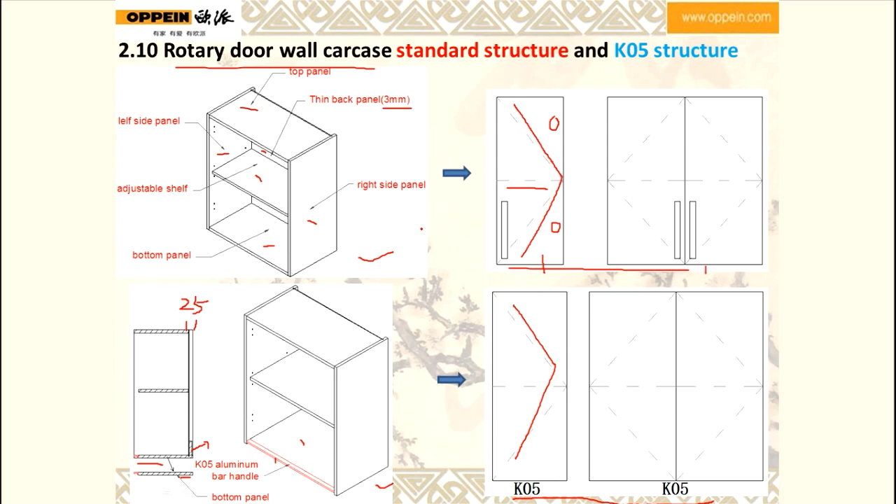For rotary door, the quantity of adjustable shelf depends on the height. When the height of the carcass is 500, it has no shelf. And when the height is 720 or 762, it has one shelf. And when the height is 914, it has 2 shelves.

And when the height is 1067, it is over 1000mm. Then the back panel is 16mm, and the carcass has 2 shelves.

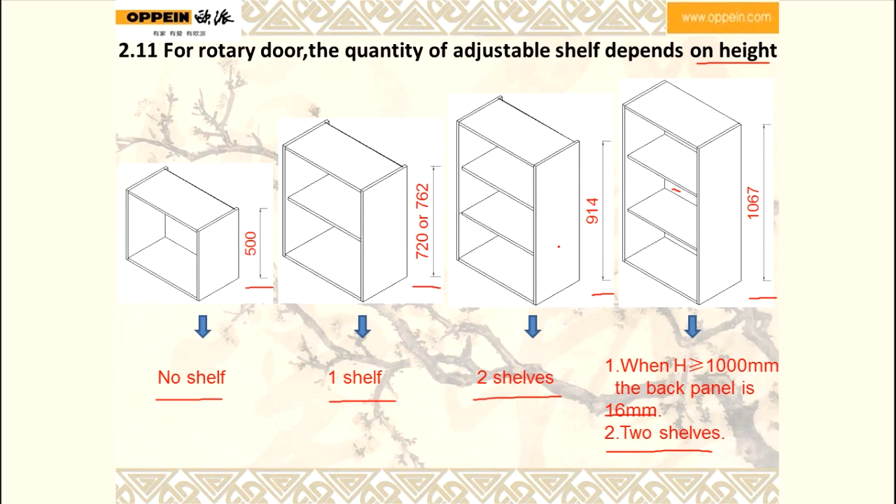Bifold lift-up door carcass. This is the standard structure, and this is the elevation of the standard structure. This is the fixable handle, and this is the bifold lift-up support code.

And this is the K05 structure. And this is the K05 elevation of the wall cabinet. And this is the code of the bifold lift-up support.

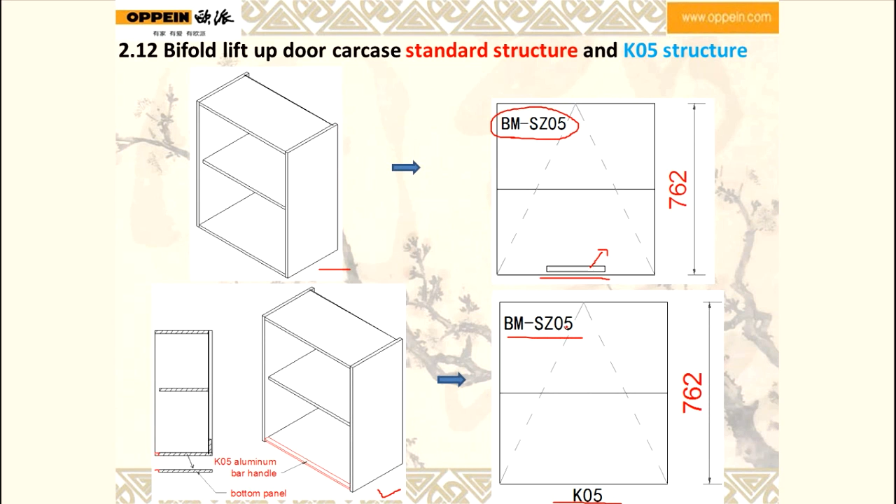Double lift-up doors wall carcass. This is the standard structure. This structure is different from the standard structure of rotary wall carcass.

The difference is here. The shelf is fixed, not adjustable, because it is for installing the hinge here.

And this one is the code of the lift-up gas support. And here H1 had better be more than 350 mil.

And this is the K05 structure of the double lift-up door wall carcass. Let's look at the elevation first. The bottom panel has K05 on it, and in the middle it is K04.

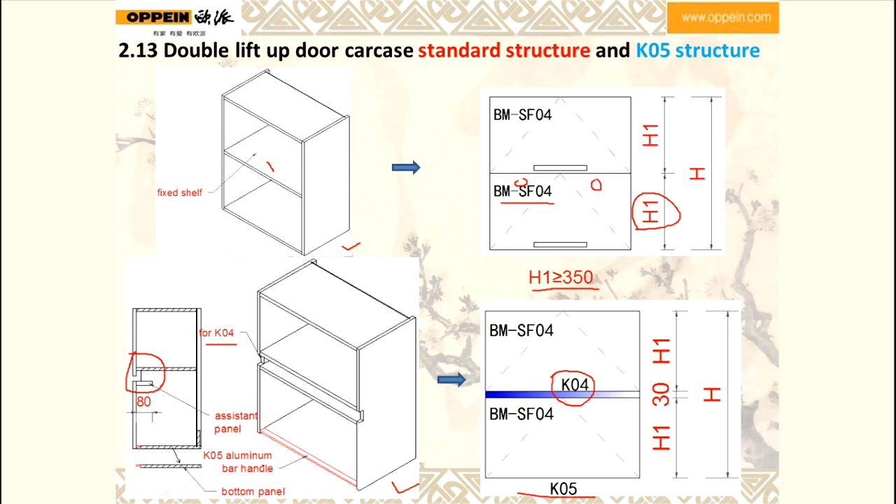This is a built-in microwave wall carcass. This is the structure. And this one is double doors on the top. This one is one lift-up door on the top. The notes of this carcass are as below.

1. For built-in microwave wall carcass, the standard depth is 330mm, and the standard width is 600mm. 2. In fact, the size of carcass depends on the size of microwave. 3. If the above door is lift-up door, then the height of the door had better be over 350mm.

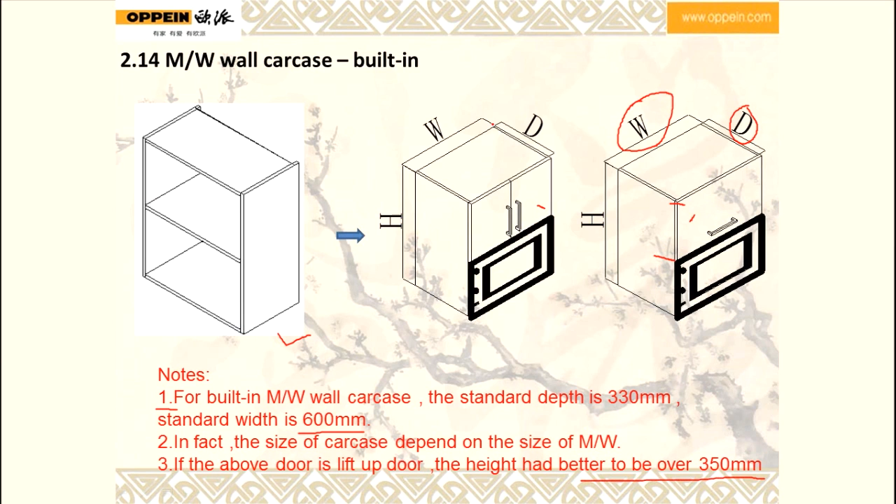This one is not built-in microwave wall carcass. The bottom panel is longer than the side panel. The microwave is not built in. It is put on the bottom panel.

And it has the arch corner on the bottom panel. It is for protecting the people from getting hurt.

The notes are as below. 1. For not built-in microwave wall carcass, the standard depth is 305. The bottom panel depth is 380mm, and the standard width is 600mm. 2. In fact, the size of carcass depends on the size of microwave.

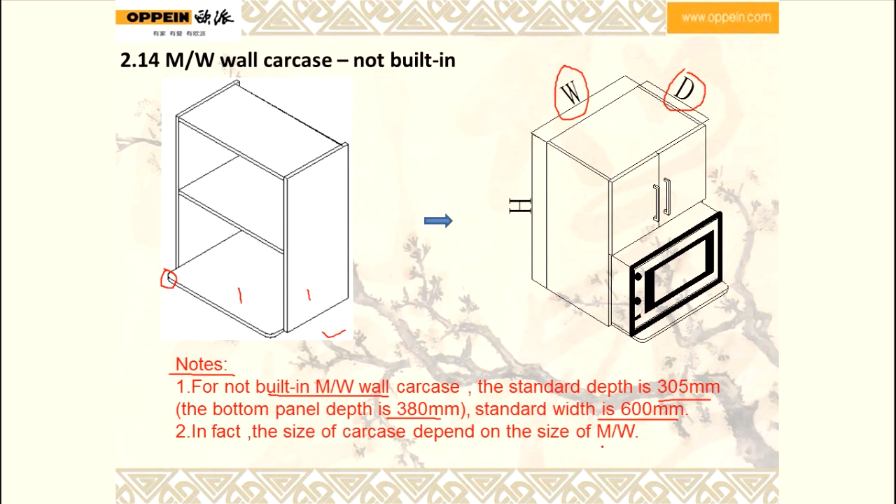Arch wall carcass. The notes of the arch wall carcass are as below. 1. The standard depth is 330mm, and the arch door used 175-degree hinge.

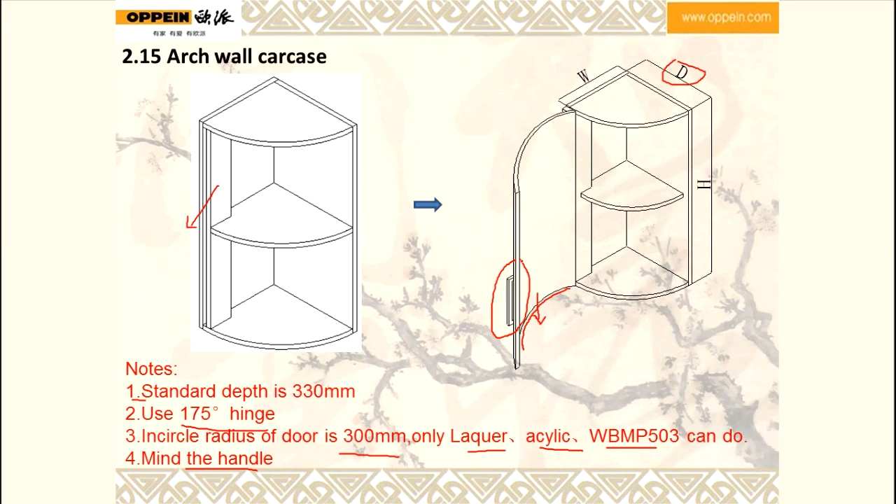Reinforced lock in wall carcass. This is reinforced lock, this one. It is for junction, and this panel is a system panel.

The notes are as below. 1. The width is between 900 mil and 1200 mil, and the depth is between 220 mil and 400 mil, and the net height is more than 220 mil.

4. The back panel is single back panel. The thickness is 3 mil. And if it has shelf, the shelf must be fixed. This is the fixed shelf.

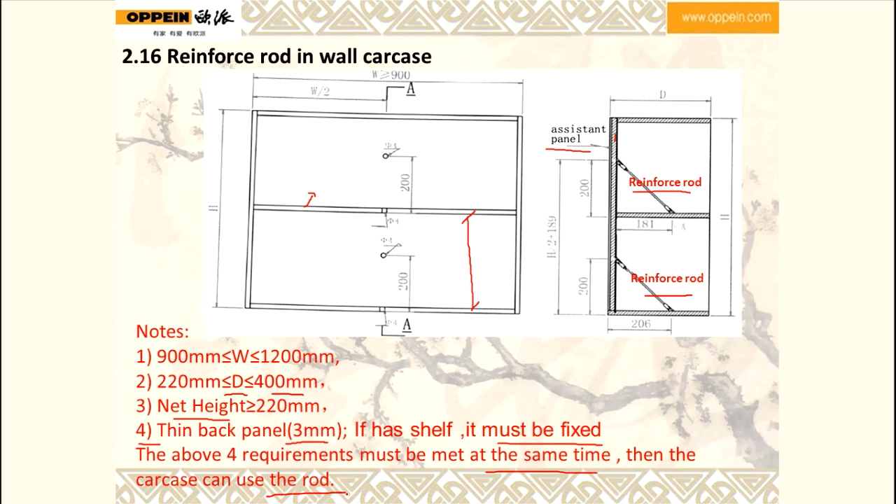The above 4 requirements must be met at the same time. Then the carcass can use the rod. The 3 pictures show us how to install the reinforce rod and how to adjust the rod.

And this is the assistant panel. This is the 3mm back panel. And then you can adjust the rod according to the need.

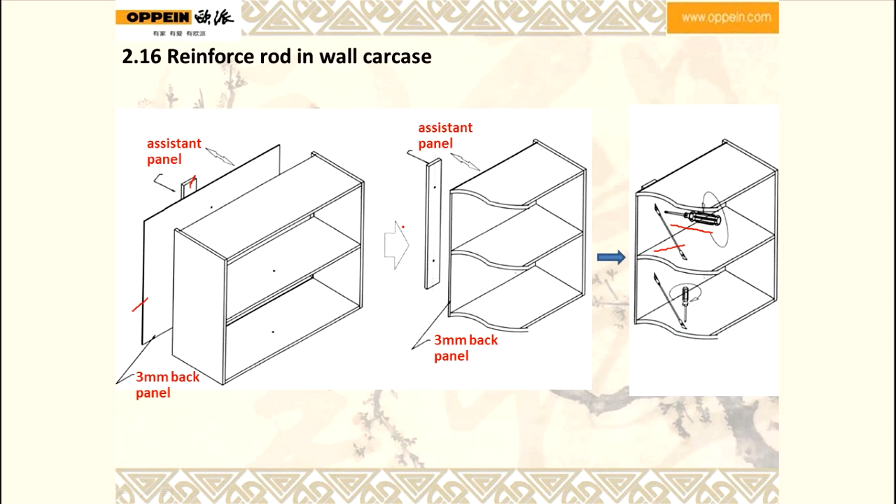Dividing panel in wall carcass. This panel is dividing panel. If the 4 requirements just now we talked about cannot be met at the same time, we use dividing panel instead of the rod. And the width is between 900 and 1200.

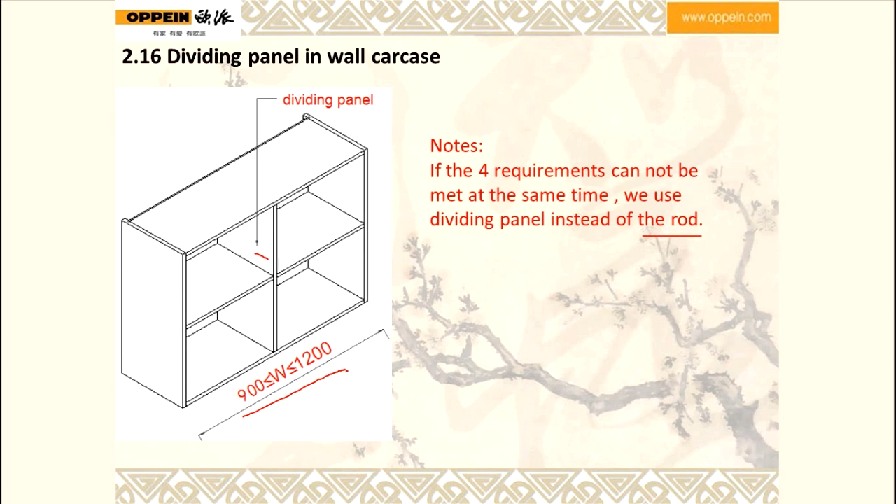Thick back panel structure. This is base carcass and this is wall carcass. The difference between the standard structure is here. The back panel is thick back panel, and here the thickness of the back panel is 16 mm.

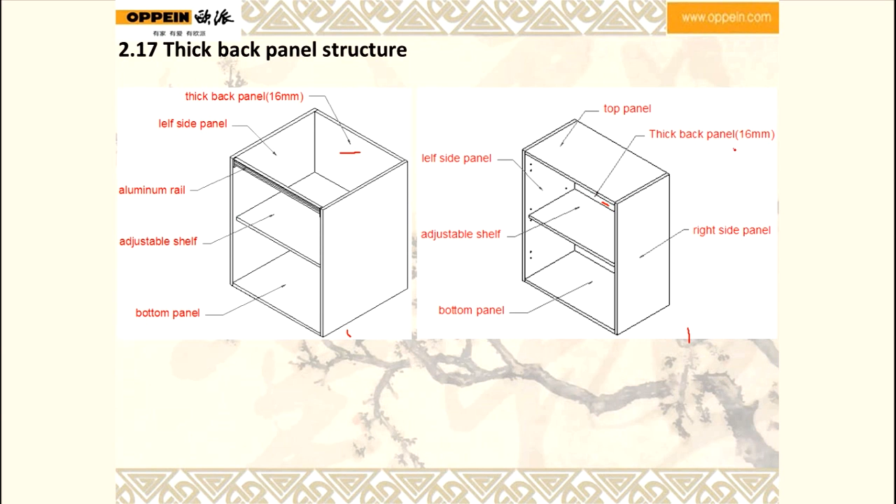So, a question: where will we use thick back panel? 1. Lazy Susan cabinet. The thick back panel is for installing the Lazy Susan basket. The thick panel price has been included in the Lazy Susan carcass price. It means that you don't need to price again.

2. Wall cabinet, which the height is more than 1000 mm. The notes are as below. 1. Thick back panel is for strengthen. 2. The thick back panel price has been included in the carcass price. 3. Don't need the suspension bracket anymore.

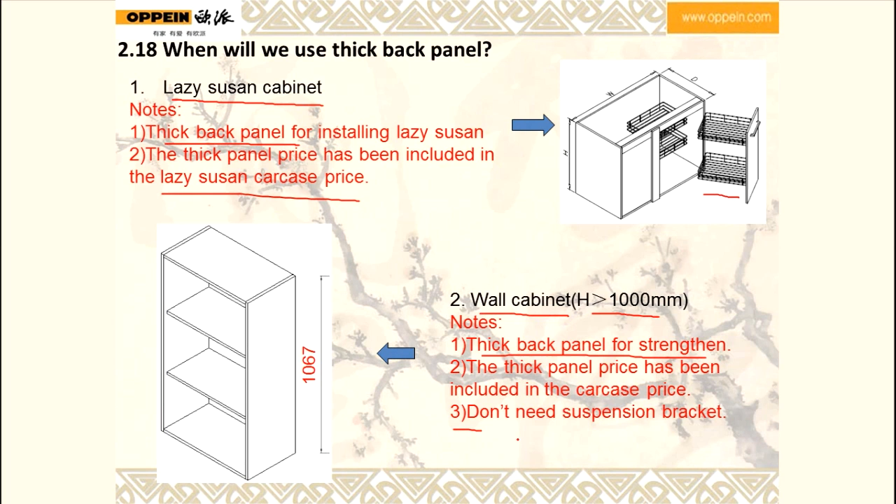3. For installing face door behind the cabinet. So this is the front side of the 2 cabinets. This is the face door. And then cabinet A and cabinet B must have thick back panel because it is for installing the face door.

Then the thick back panel price needs to calculate alone by area. 4. Oven and microwave tall cabinet or middle top cabinet, and we will talk about it later. 5. Customer request.